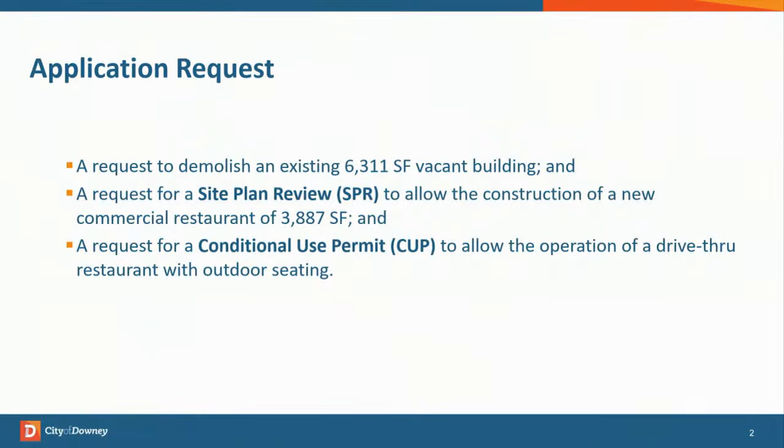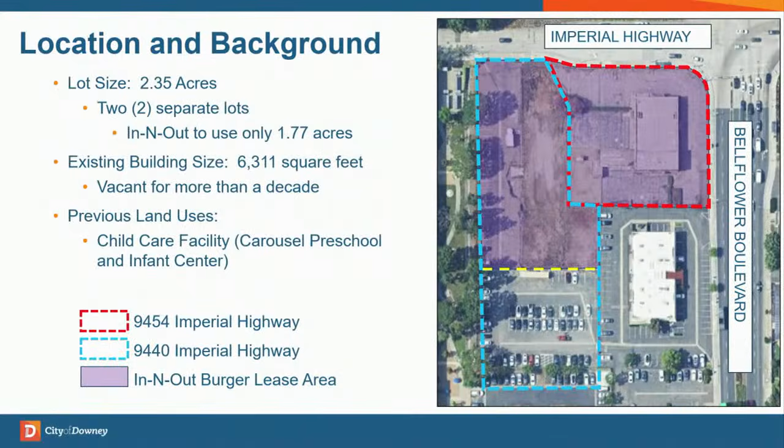The project site has an existing vacant building that has been vacant for more than a decade, which will be demolished as part of this project. The previous land use was a child care facility named Carousel Preschool and Infant Center.

The project site is surrounded by various land uses. To the west and north, we have Kaiser facilities. To the west is the fulfillment center for the pharmacy, and to the north is the Orchard Medical Building for Kaiser.

Can I ask a quick question on that? The Kaiser Fulfillment Center, that's not open to the public per se, is it? I went by there today and it looks like it's fenced in, or they have to come in the other way, but I don't think you can just come in there. No, I believe it's all fulfillment center, so it's for shipping, not for the public. Great, thank you, sir.

To the east, we have other drive-through businesses such as Starbucks, Jack in the Box, and the restaurant Stox, and a multi-tenant commercial building, and single-family residential properties. To the south, directly adjacent to the property, is another multi-tenant building, a parking lot, and the restaurant of Lucky Burgers.

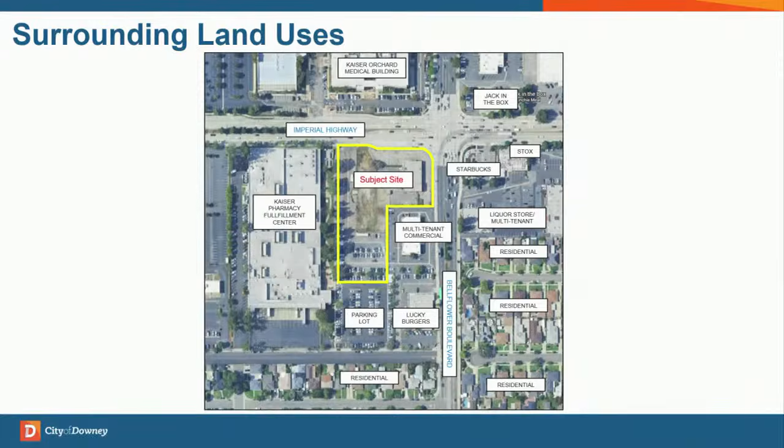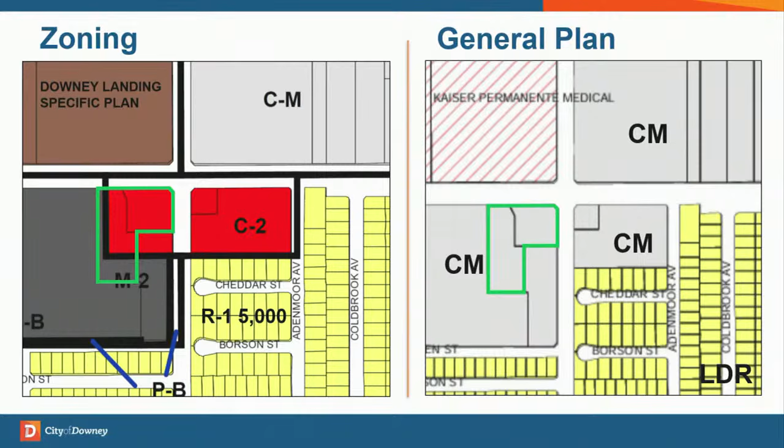The property is split zoned, so it's zoned C2, general commercial, and M2, general manufacturing. The general plan designation for the site is shown as CM, commercial manufacturing. Although the zoning and the general plan land use designation of the property are inconsistent, the use is allowed in both the C2 and M2 zone, aligning with the intent of the commercial manufacturing designation.

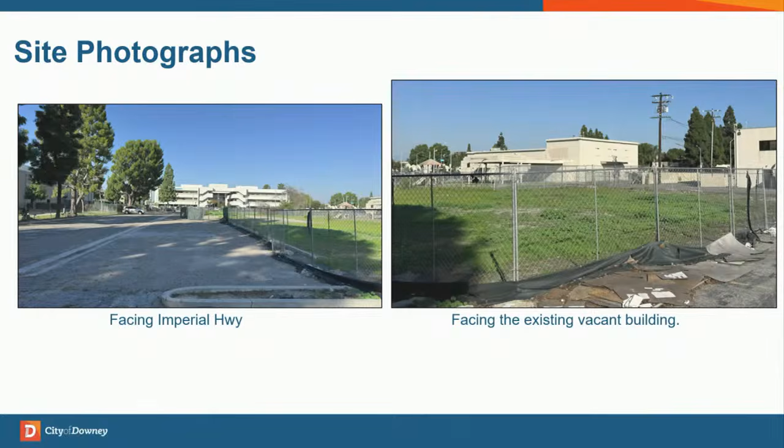As stated earlier, the project site consists of two properties, 9440 and 9454 Imperial Highway. In-N-Out will lease from the property owner the entirety of 9454 Imperial, which is the corner property in red, and the portion of 9440 Imperial.

Both properties will remain separate, but they will be held together through a lot tie covenant. The lot tie covenant will be recorded with the LA County Recorder's Office. In addition, the south portion of 9440 will remain a parking lot as it currently is. The restaurant and outdoor dining and the trash enclosure will all remain within 9440 Imperial. You could briefly see that in gray on the right image.

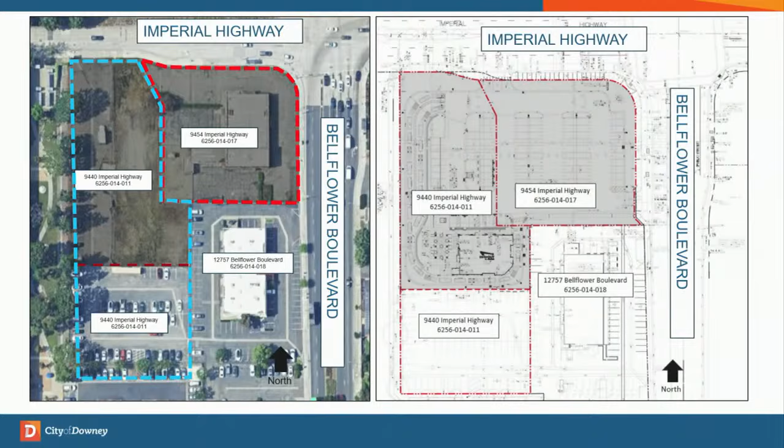The Bellflower improvement is not considered a dedication since the city has already purchased this portion of the property in 2015 when the city was conducting street widening improvements. Didn't the city take that corner a couple feet right before that too, in eminent domain? On the corner, we bought that off of them? I believe it was through eminent domain for that intersection, 2013, along with other property acquisitions for the other properties at that intersection. I'm an anti-eminent domain person, but that made sense there. I voted on that, so.

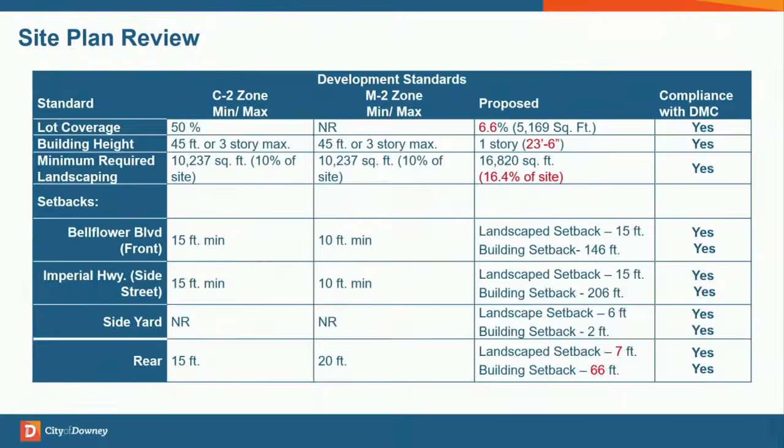Can I ask, of the 32 cars in the queue, how many can be inside that parking lot at any one time? That's obviously everybody's concern. At the time the plans were submitted to staff, that wasn't shown, but In-N-Out did provide some slides after our presentation. Those slides, I believe, show 59 spaces within the parking lot.

Could you also tell us how this compares to Lakewood and Firestone? I'll cover that later, but to answer quickly, the project at Lakewood and Firestone was approved for 14 queuing stalls, within the actual drive-through, not throughout the site. So that's 14 versus 32 here. Correct. That's great. Thank you.

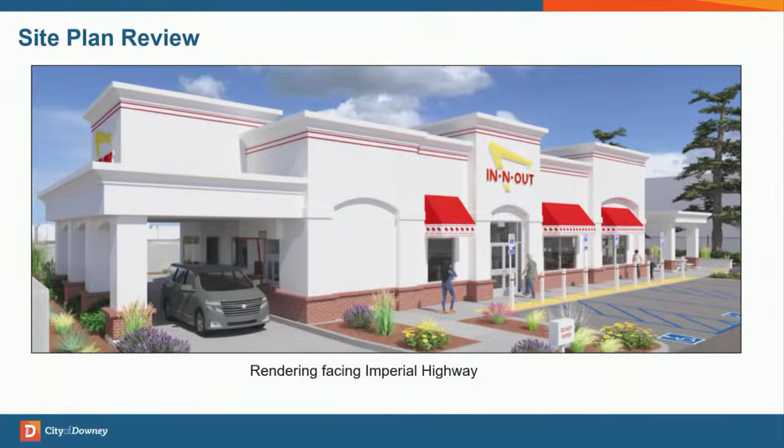The building uses contemporary modern architecture to keep the signature In-N-Out look. It will have varying roof heights with parapets ranging from 19 to about 24 feet, which allows the rooftop mechanical equipment to be screened from public view. Additional elements include red awnings over the windows and a red brick wainscot at the base of the building, wrapping around the entire structure to contrast the company's milk glass stucco color.

Mr. Luna, the million-dollar question — where would the iconic signage go? We did preliminarily receive a sign package; it'll be at the corner. I imagine you're thinking the X-shaped one — correct, yes. So that'll be at the corner, at the intersection of Bellflower and Imperial.

Okay, thank you. These are additional color elevations. Highlighted in red in the middle of the top image is the primary entrance facing Imperial Highway. The west elevation, facing the Kaiser Pharmacy Fulfillment Center, also has another entrance.

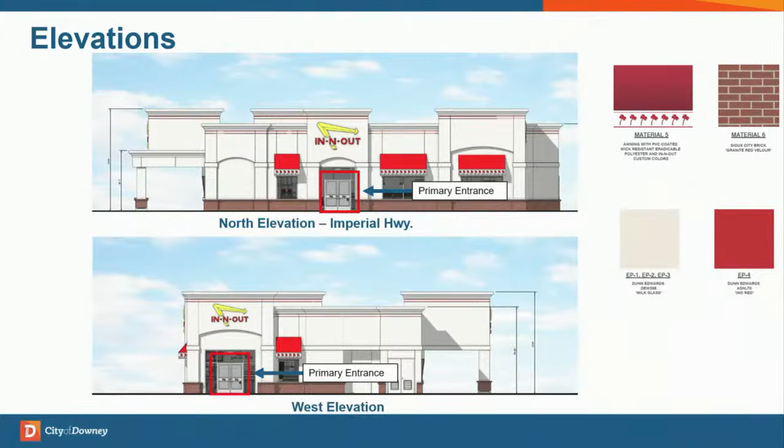Can I ask another question — this is 3,890 square feet. How big, square footage-wise, are the Firestone and Lakewood locations, just to get a visual comparison? I don't actually have that number — maybe the applicant can tell us at that point.

The elevations for the south and east are where the driveway wraps around. The south elevation has the payment window, and the east elevation has the pickup window.

Moving on to landscaping, a variety of plants will be part of this project's landscape palette. The site will have approximately 37 added trees from 5 different species and approximately 52 palm trees from 3 different species, in addition to native and drought-tolerant plants and shrubs. Most of the landscaping will be at the perimeter of the site and within the parking lot areas, improving the curb appeal at the corner of Bellflower and Imperial.

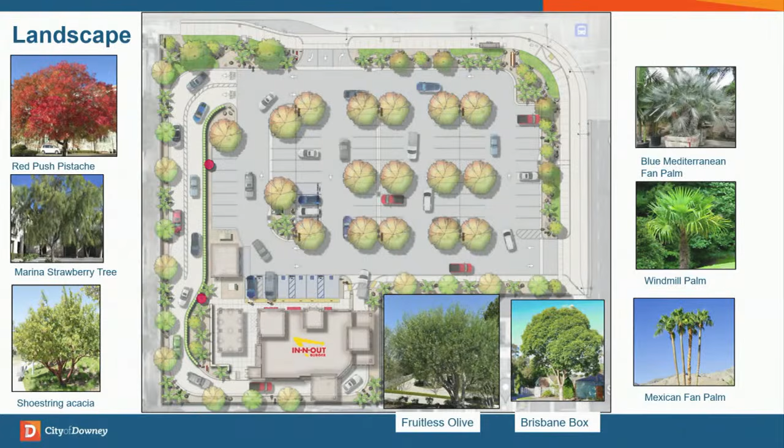Moving on to the drive-through, the project will have a double-lane drive-through that funnels into one lane at the order menu board toward the south end of the site. The drive-through will accommodate 32 cars within the drive-through lanes, which is sufficient based on the queuing analysis that was part of the traffic impact study, submitted by the applicant and reviewed by the Planning Division and Public Works Department.

But that first lane there, that's part of a queue, if you will, to go in there? Right, we call it a deceleration or dedicated right turn lane, and that's dedicated for turning into the project site, yes.

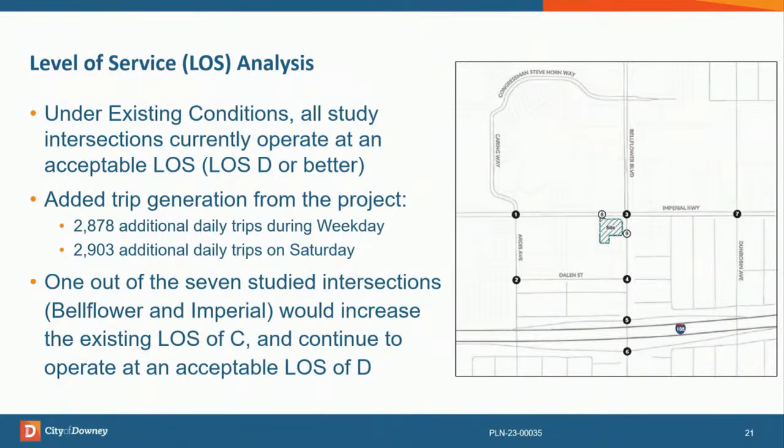So in relation to the queuing analysis, the off-site improvements will be required along both street frontages of Imperial Highway and Bellflower. The Imperial Highway improvement involves a roadway dedication of approximately 450 square feet to accommodate extension of the existing deceleration lane. This extension will accommodate right turns into the site without impacting traffic flow from Imperial Highway, specifically the right turn onto Bellflower.

The Bellflower Boulevard improvement is about 4,000 square feet. According to one of the plan sheets, it shows a cross gutter 6 feet wide, new sidewalk, and new lighting. So how is that going to mitigate the traffic impact if you're driving southbound on Bellflower Boulevard? What is that going to do to the traffic when you have an overflow?

So what is that 6 feet going to do to the impact of the flow going to the restaurant? Essentially this street improvement on Bellflower will add a third lane on Bellflower South. That lane adjacent to the project site is now only a right-hand turn in into the project site. The 2 existing lanes on Bellflower will still remain for traffic flow to flow south on Bellflower.

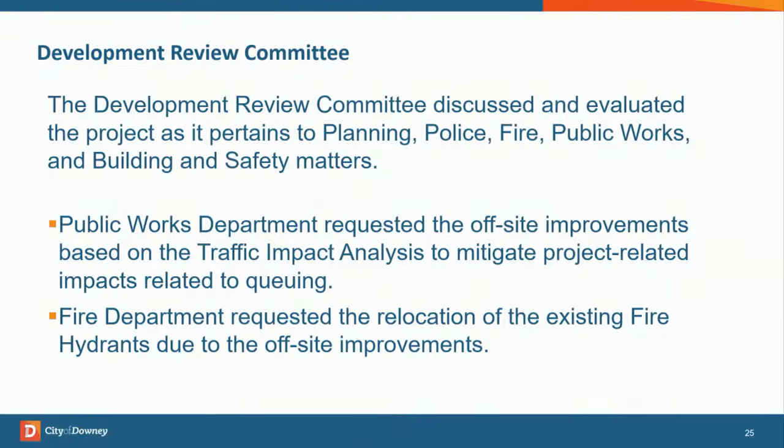The project was categorically exempt from CEQA under the Class 3 exemption for commercial properties that do not exceed 10,000 square feet.

A public notice was published in the Downey Patriot and sent to all property owners and tenants on November 20th. No opposition was received for the project.

In conclusion, staff recommends that the Planning Commission approve resolution number 25-4056 with the revised conditions of approval. I forgot to mention that we do have some revised conditions of approval which are on your dais. That changed 3 conditions in the resolution, and there are copies available for the public in the back.

That concludes my presentation. I'm available for any questions. Also with me, I have our principal engineer from Public Works, Tim Berthestel, and the applicant for In-N-Out and their traffic consultant to answer any questions.

Chair Guerra, if I may, also the conditions of approval in the staff report have been shared with the applicant's team, along with the revised conditions, and they are accepting the conditions. So there's nothing really big there.

Does anybody on the Planning Commission have any questions of staff? I know we were hitting him throughout, like we always do, so we appreciate your steady hand, sir.

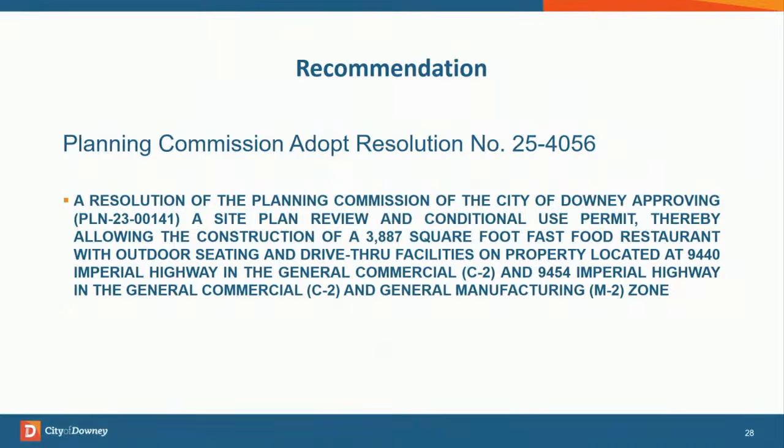Anybody? I don't have any questions, just a couple comments. Mr. Luna, great presentation, thank you for your time. I'm personally excited, I also drove by the site, and God knows we need a second location. The Firestone location, the traffic there could use some help. So thank you for this.

Anybody else? I have a question. In the event there is a backup on Imperial Highway entering the restaurant going eastbound, is there any provision at all to resolve that matter? We have conditions of approval that require the applicant to ensure queuing remains on site. Usually what In-N-Out does during peak times is send out staff to cone off the entrance on Imperial Highway to ensure queuing remains on site, so it'll flow throughout the project site. I'll show that on this slide. If you look to the right screen, the entrance will still be open, however queuing will wrap here and wrap all the way down there.

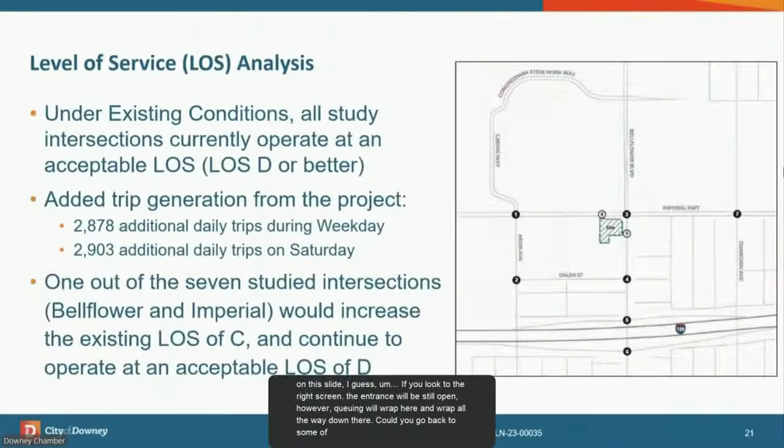Could you go back to some of the early slides, the land itself that was there before? So that bottom part there where there's a parking lot and so forth, is that new land that was there? Because I remember the long building that we all literally took apart piece by piece there for the last 40 years, that was so ugly and terrible. So what made this happen, that they bought more land?

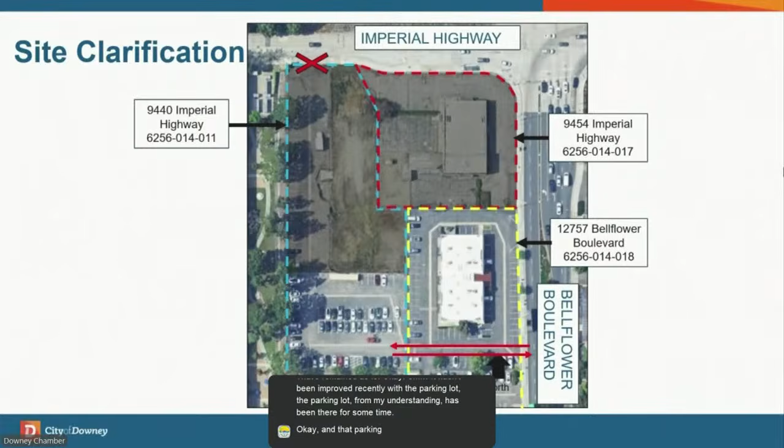It hasn't been improved recently with the parking lot. The parking lot, from my understanding, has been there for some time. And that parking lot is not going to be there anymore? No, because the land is up on top. So that parking lot will still remain.

I think this might show it a little better. It's a little bit smaller, but you see the project site and you see the remaining parking lot.

You're too young, but before you were born, that used to be a Jack LaLanne gym. Believe it or not, I once went to the gym. I know I don't look like it anymore, but I used to work out there, Jack LaLanne. It's been gone for 45 years, shows you how old I am. How much was a monthly membership back then? Oh, it was probably a couple of cheeseburgers worth, so it wasn't very much.

Anybody else, Mr. Lujan, Ms. Uva? Just a quick question. I know that the In-N-Out on Firestone, sometimes people trying to eat at the restaurant have a challenging time because the queue is inside. With the queuing here in the parking lot, will it avoid some of that congestion when people are trying to eat at the restaurant?

So the 32 car spaces for vehicle queuing would not impact the rest of the parking spaces. It doesn't create any dead-end drive lanes. It will still remain accessible to any patrons wishing to eat at the restaurant. In addition, with the additional parking provided, they could cone off portions of the parking lot to have the queuing flow better and still allow vehicles to park without getting trapped by the queuing.

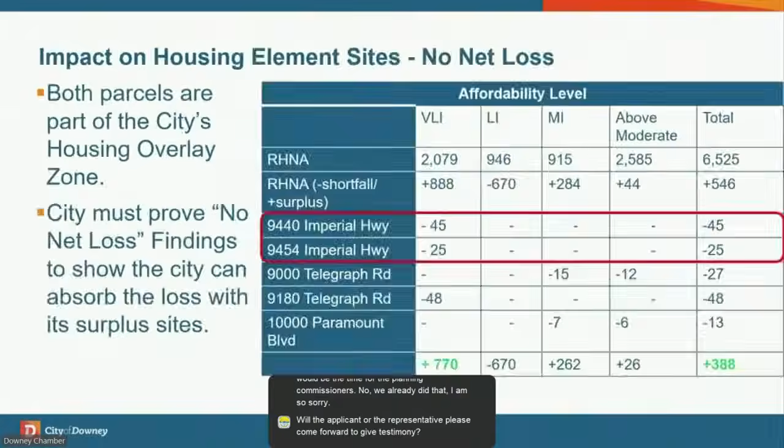Before I open the public hearing and call the applicant or representative, this would be the time for the planning commissioners. No, we already did that. I am so sorry. Will the applicant or representative please come forward to give testimony? I did call this before, didn't I? I called the public hearing. Should I do it now? I don't think I officially said the public hearing was open, so we will officially call it. I did want to make it really tough on our city attorney asking legal questions since it's his birthday today. I think we should make it as hard as him to have to work today and interpret things, sir. I'm teasing you, but happy birthday, sir. He got nervous, like, what the heck is Chair Guerra doing there. Sir, welcome, yes sir.

Thank you, happy birthday, John. Good evening, Honorable Chair and fellow planning commissioners. My name is Peter Kolmaticki, and I'm a development manager with In-N-Out Burger.

I'm excited to be here this evening to propose our second location within the city of Downey. First, I'd like to take this opportunity to thank staff, especially Abraham Luna and Irma Huitron, for their hard work and responsiveness during the development review process. Their constant communication and coordination is truly impressive and should be recognized.

I will keep my remarks brief, but I would like to spend a few moments touching on the history and culture of In-N-Out Burger before discussing our proposed project.

In-N-Out Burger was founded in 1948 by Harry and Esther Snyder in Baldwin Park, California. Now more than 77 years after they opened that very first location, with over 400 stores operating in 9 states, In-N-Out is still a family-owned business. Every single In-N-Out Burger is 100% privately owned and operated. We do not franchise. Harry and Esther's granddaughter, Lynsi Snyder, is the owner and president of In-N-Out, and she continues the legacy with our core values of quality, service, and community.

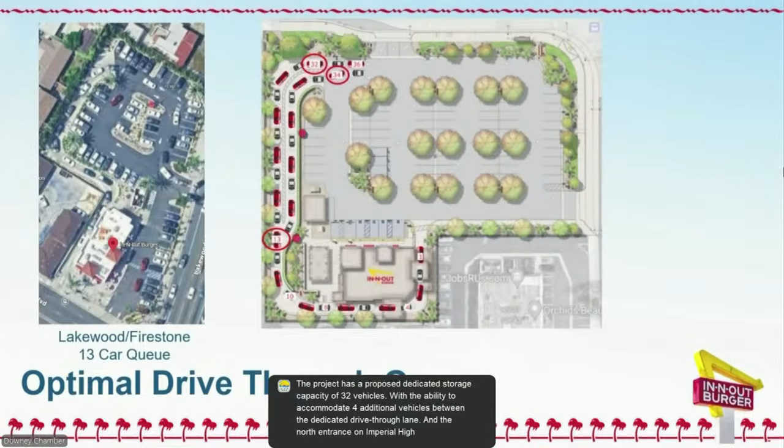In addition, In-N-Out has developed a very sophisticated system, implemented in new stores, to speed up queue movement during peak times. Our queue management system begins when the stack reaches the menu board at car 10. At this stage, associates are deployed with handheld devices to take orders outside.

Awareness of the queue reaching the 10th car is enhanced with outdoor cameras and indoor monitors. There will be between 4 and 6 outdoor cameras on site, with 3 or 4 of them specifically viewing the drive-through lane. These exterior cameras display on multiple monitors located inside the restaurant, including the manager's office, above the grills, and at both the pay and pickup windows.

If the queue were to extend past the dedicated queue length, additional associates are deployed to manage the queue and traffic on site. This restaurant will be equipped with 3 burger grills.

2 grills will operate at all times. Activation of the 3rd grill will be done in response to high dine-in or, more typically, high drive-through demand, as activating the 3rd grill significantly increases the speed at which drive-through orders are delivered to customer vehicles.

To avoid any disruption to surrounding roadways, we have overstacking capacity of up to approximately 59 vehicles on site. With these practices and site design, we were intentional about minimizing impacts to the neighborhood and getting our customers onto our site as efficiently as possible.

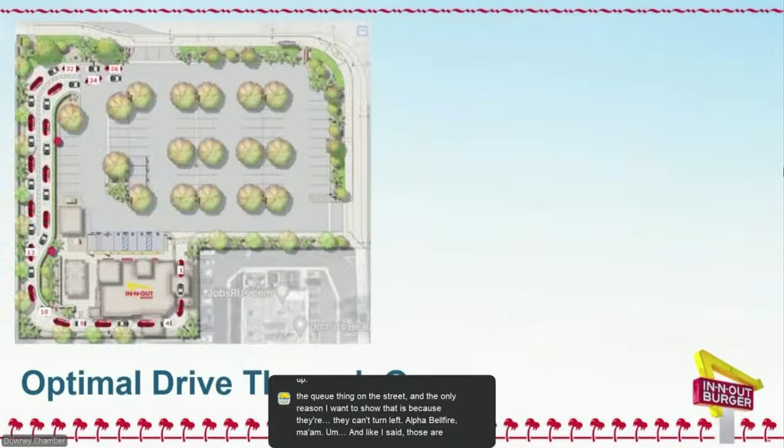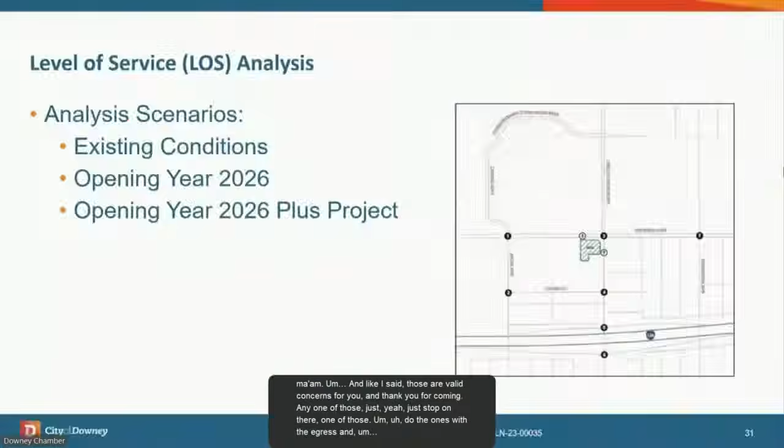Could you, Alfonso, put up the queue thing on the street? The only reason I want to show that is because they can't turn left off of Bellflower, ma'am. Those are valid concerns for you, and thank you for coming. Any one of those, just stop on there, one of those. Do the ones with the egress and the ones before. Okay, that's a good one here. Go back, there we go.

This is good, because you can see the side entrance here on the right side, ma'am. You live just south of that building there. You can only go right off when they're leaving there. They can't go left because there's a median in the middle, and the same thing up here. It would have to be somebody going northbound on Bellflower literally making a U-turn at the corner to turn around. They can't go into that queue and make a left-hand turn off of Bellflower.

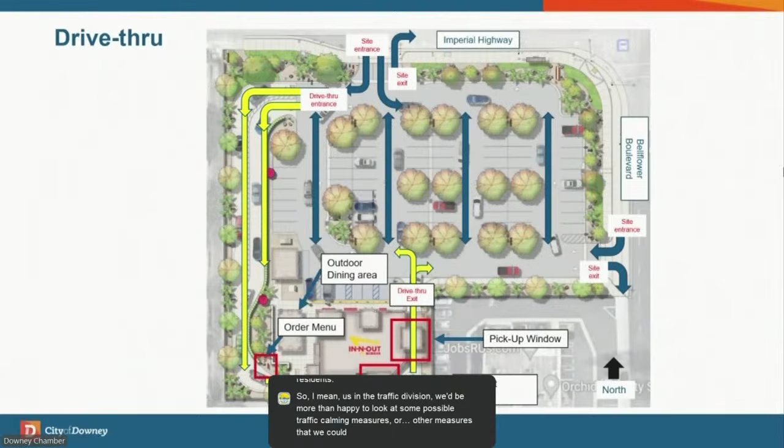I'll let the staff answer that, but those are valid thoughts, ma'am. That is correct, the medians restrict the left turn movements. But that said, we frequently review these types of issues brought forth by residents. We in the traffic division would be more than happy to look at possible traffic calming measures or other measures we could implement on Downey to alleviate residents' traffic concerns.

How far does the median go down there? Is there a better view that shows all of that? That shows another angle, there was one that was the actual footage. Maybe go back, sir.

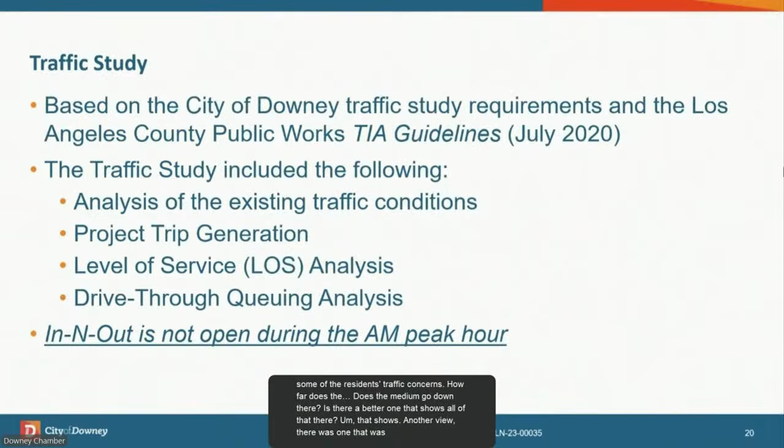Okay, so there's the building there. So you live just south of this, where that little green thing is at the bottom of the page, right? Chair Guerra, I think the median ends just north of Dalen, which is the first west-east street, right below the end of that median. I wasn't sure if the resident lived on Dalen and Borson, but Borson is what I thought I heard — that's the next street south of Imperial, so that's the second. Are we allowed to turn left into the other burger place? Yes, you are. So that queue there doesn't extend there. So you live just south of that?

Okay, we get a lot of overflow from the Kaiser facility, so we get a lot of traffic just speeding by our street, and on Dayland Street, because when traffic backs up making a left toward Imperial — that's a two-way, there's a U-turn allowed, but a lot of people don't know how to make that U-turn. So it backs up traffic because of people making U-turns, especially since it's right off the freeway, off the 605 and the 105. It's a very congested freeway, with Bellflower going north. So that's our biggest concern, because a lot of people use our street, Borson Street and Dayland Street, as a way to bypass that traffic.

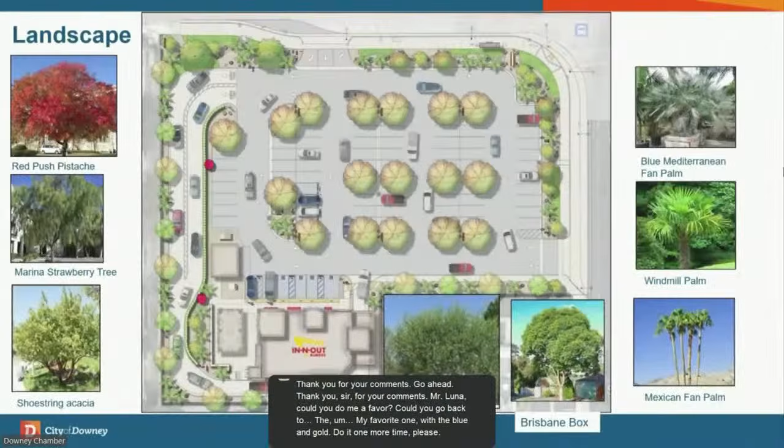Go ahead, thank you sir for your comments. Mr. Luna, could you do me a favor — go back to my favorite one with the blue and gold. The blue one, one more time please. Yeah, there, that one. No, yes, I'd like you to go ahead and pinpoint where our resident made those comments.

Sir, there will be an entrance on Imperial and another one on Bellflower. Correct, so we have both, not just Imperial. No, that's my point — but if people are making the U-turn, if you go by there, in order to make a U-turn you have to make it really wide. Sure, understood. A lot of people make it short and sharp, and that backs up traffic. It's a way for a car — so no matter which way you look at it, it's going to cause more backup than it already does, going north. So this is just going to cause more.

Chair, we're not able — if we could record public comment — that would be ideal. Thank you. We're out of line now. You guys are nice people with valid concerns, and we're trying, but the three minutes are up and we really shouldn't be doing this, but we understand.

And yes, sir, go ahead. From the Public Works traffic side of things, we'll initiate a traffic speed study. We have city-owned counters, so we can have our staff place them on Dahlin and Borson and look at what impacts are actually occurring on that street. So that's a bit of an answer — we'll check that out.

And then number two, I wanted to make sure we're clear. There's nothing in this we're approving, and there's no plans to put any digital boards or signage on the freeway. I just wanted to confirm that from staff. From the sign package we received preliminary from In-N-Out, there are no digital boards proposed for the site, only monument signs and wall signs attached to the building. Thank you, just wanted to answer that.

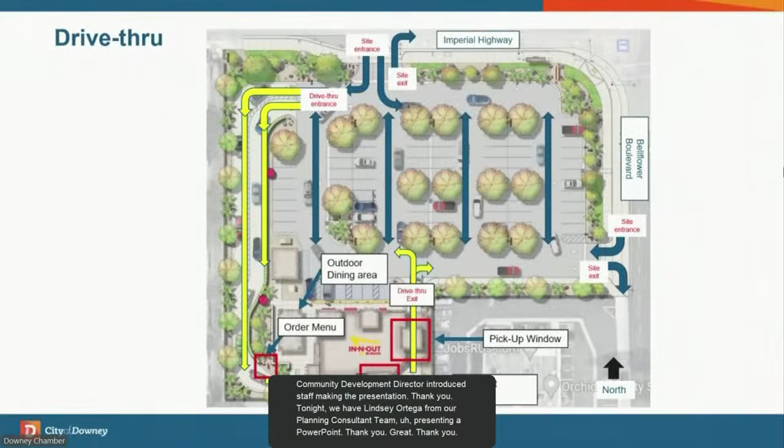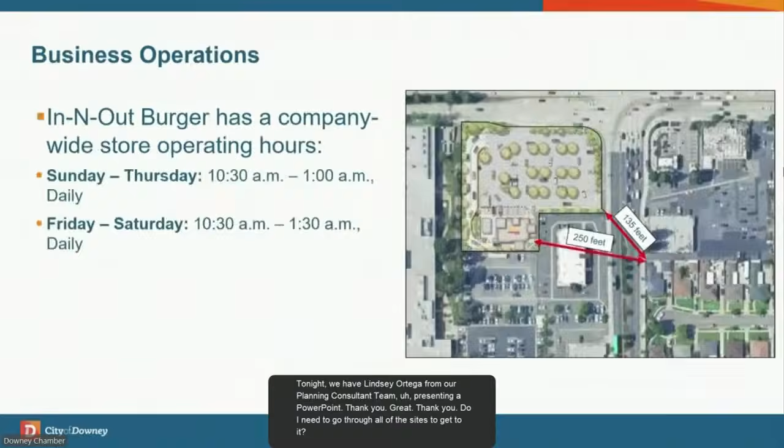Do I need to go through all of the slides to get to it? Okay, oh yeah, we're sorry. Pick your favorite and we'll go back to it.

Good evening. Hello, Chair Guerra and members of the Planning Commission. My name is Lindsey Ortega, and I will be presenting PLN 25-00127 to you today. Before you today is a request for approval of a conditional use permit to permit the operation of a 139,745 square foot entertainment center with arcade, bowling alley, indoor sporting activity area, and a restaurant with an ABC Type 47 on-premise sale and consumption of alcoholic beverages.

A conditional use permit is required to permit on-premise sale of alcoholic beverages, commercial recreation, and arcades within the Stonewood specific plan. Although a commercial recreation facility use is not explicitly listed as a permitted use in the Stonewood specific plan, the specific plan does permit uses not specifically listed to be considered by the Planning Commission through a conditional use permit. Other commercial recreation facilities that operate at the Stonewood Center include Galactic Challenge and Candyland Kids. The Stonewood Center is located on the north side of Firestone Boulevard between Lakewood Boulevard and Woodruff Avenue on a 63-acre site.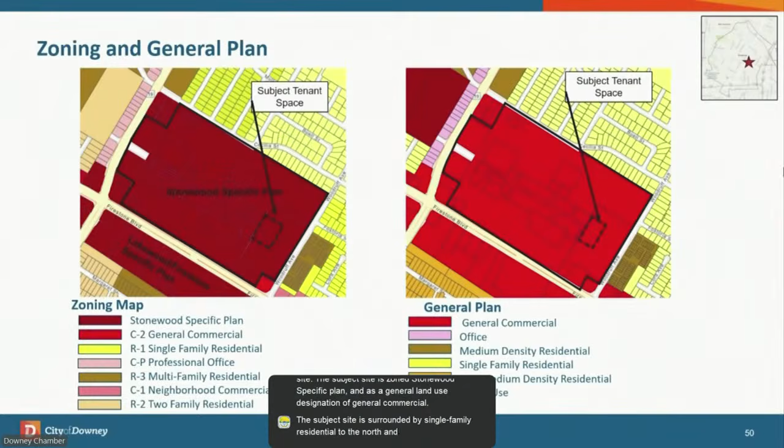The subject site is zoned Stonewood Specific Plan and has a general land use designation of general commercial. The subject site is surrounded by single-family residential to the north and east, and commercial and office use to the south and west.

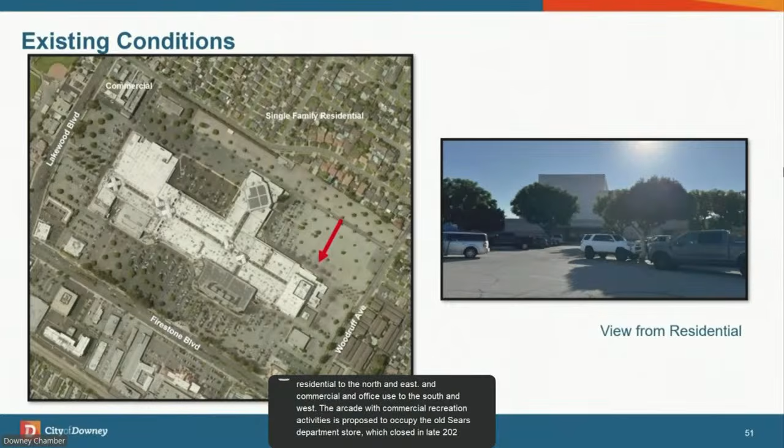The arcade with commercial recreation activities is proposed to occupy the old Sears department store, which closed in late 2021 at the Stonewood Center. Here's a view from the single-family residential, a view from Woodruff, and a view from Firestone, as it is today.

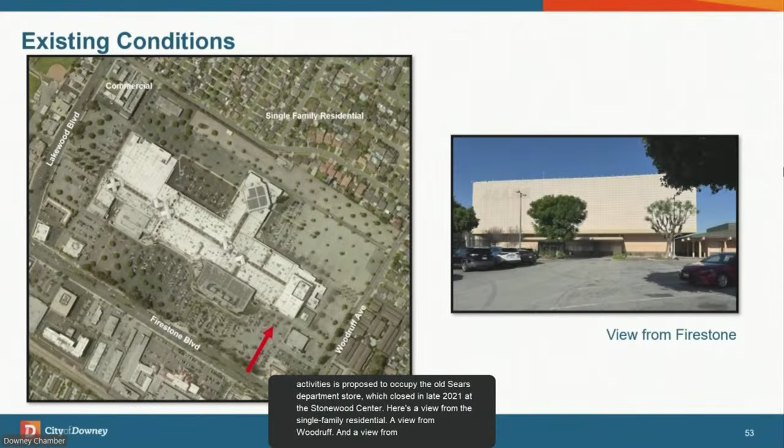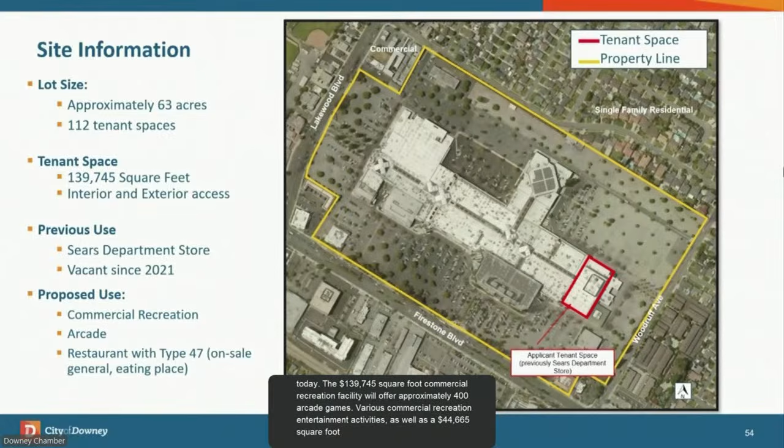The 139,745 square foot commercial recreation facility will offer approximately 400 arcade games, various commercial recreation entertainment activities, as well as a 44,665 square foot food hall with a Type 47 license for on-premise alcohol sales. The proposed hours of operation for the arcade, commercial recreation use, and restaurant are 10 a.m. to 2 a.m., Monday through Sunday, and the use is intended to serve as an entertainment center for all ages.

Private rooms will be available for rent to host birthday parties, corporate events, and used for private karaoke rentals. The private rooms will include TV, karaoke equipment, and feature a clear glass wall and door to ensure full visibility from common areas at all times.

The first floor of the 3-story entertainment use includes a 16,472 square foot entertainment area, including the arcade, as well as a 44,665 square foot dedicated area to food preparation and food service, with some area used for office space and storage.

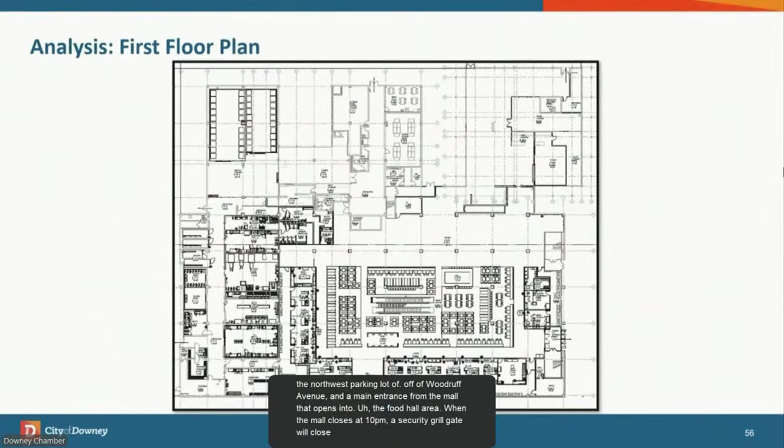There are 3 entrances on the first floor: a primary entrance from the parking lot facing Firestone Boulevard, a secondary side entrance from the northwest parking lot of Woodruff, off of Woodruff Avenue, and a main entrance from the mall that opens into the food hall area. When the mall closes at 10 p.m., a security grill gate will close access from the mall to the Round 1 facility.

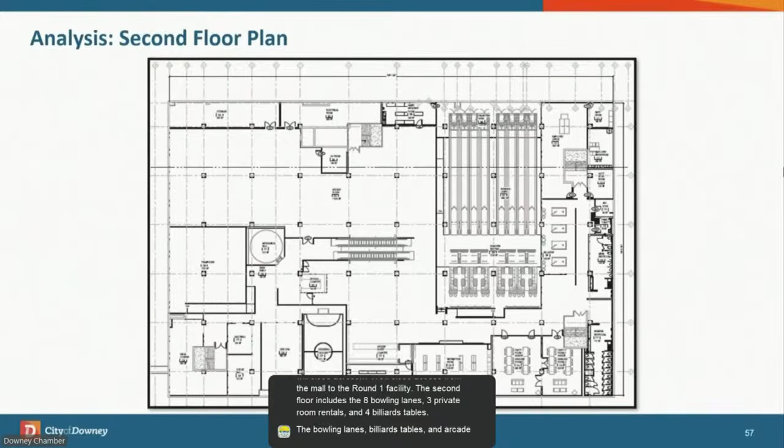The second floor includes 8 bowling lanes, 3 private room rentals, and 4 billiards tables. The bowling lanes, billiards tables, and arcade games can be used based on a pay-per-use basis.

The third floor offers an additional arcade space, as well as a signature feature of the entertainment center called the Spocha, or the Sports Challenge Area, which serves as an indoor sports complex offering dodgeball, trampoline, ninja course, kids gym, basketball, indoor soccer, inline skating, pickleball, and batting cages.

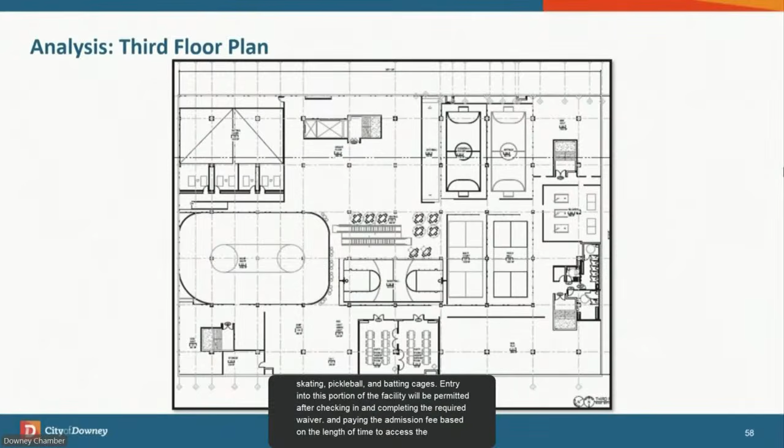Entry into this portion of the facility will be permitted after checking in and completing the required waiver and paying the admission fee based on the length of time to access the area. This grants unlimited access for the specified timeframe to enjoy the different activities.

The 44,665 square foot food hall is located on the first floor with access points into the main mall, and the food hall will offer a variety of Japanese food options with restaurant seating and a single bar located in the center of various restaurant options.

The food hall will also serve as a central kitchen where food will be prepared, packaged, and distributed to Round 1 affiliated food hall locations throughout Southern California. All food will be prepared on-site by Round 1 employees, with service provided throughout the day and evening hours, and pickup for the central kitchen is to occur twice a week in the morning.

However, demand may grow, and pickups may also occur more frequently. Food will be distributed through the use of small refrigerated Sprinter vans.

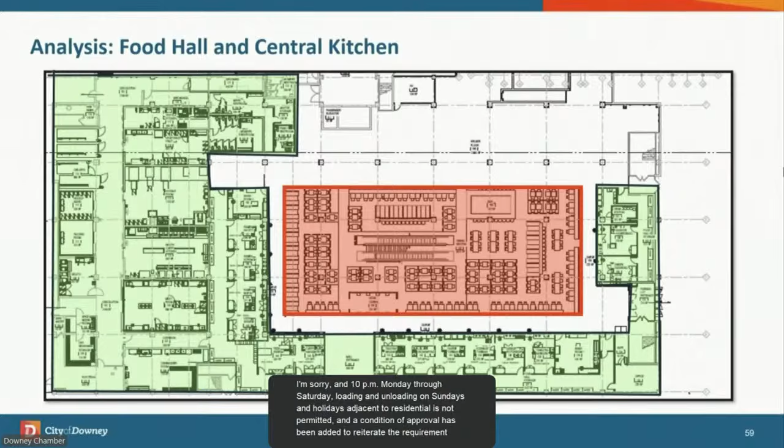The Stonewood Specific Plan limits loading and unloading adjacent to residential uses to only occur between 7 a.m. and 10 p.m., Monday through Saturday. Loading and unloading on Sundays and holidays adjacent to residential is not permitted, and a condition of approval has been added to reiterate the requirement from the specific plan.

A Type 47 ABC license for on-premise sale and consumption of alcohol is proposed in conjunction with the restaurant and food hall. Alcoholic beverages may be purchased in the food hall restaurant area and may be consumed throughout the entire recreational facility. Consumption of alcohol will be monitored throughout the facility by way of ID verification, and a curfew plan is proposed for the later hours of operation.

A third-party security company will be utilized by Round 1, ensuring orderly conduct throughout the facility, including the purchase of food and alcohol.

Previously, the Sears tenant space was calculated at a rate of 1 space per 200 square feet for the 143,427 square foot tenant space. This required 718 parking spaces.

Per the Stonewood specific plan, the commercial recreation facility would be classified as other commercial uses, which would require a 1 space per 1,000 square foot requirement, resulting in a total of 476 parking spaces for the commercial recreation use. In total, the proposed use would require 521 parking spaces.

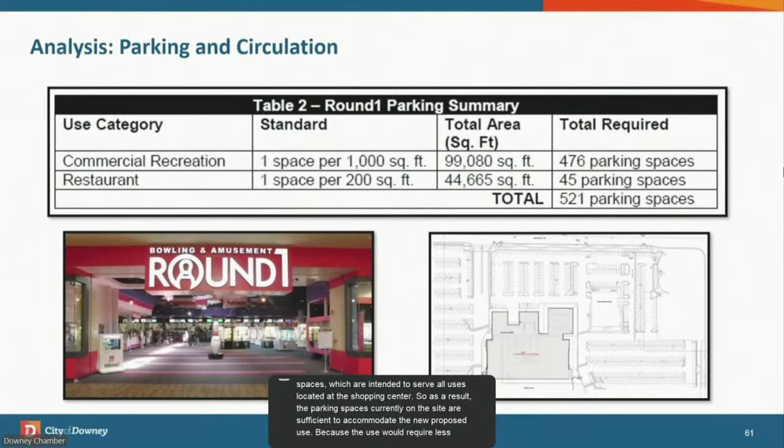The Development Review Committee discussed and evaluated the project as it pertained to planning, police, public works, building and safety matters, as well as fire. Two noteworthy conditions include: all loading and unloading shall comply with the Stonewood specific plan, and the operator shall implement a curfew plan that includes announcements over the store speaker 30 minutes prior to each curfew.

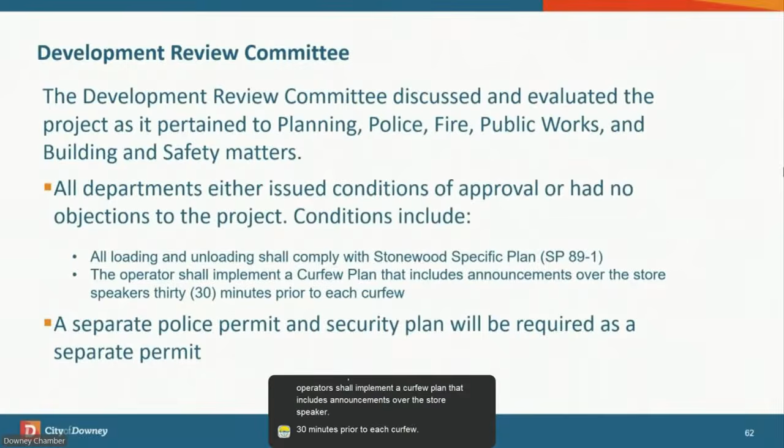The conditional use permit is categorically exempt from review under CEQA guidelines Section 15301 because it has been determined to not have a significant effect on the environment, due to the proposed use being contained within an existing building and not resulting in an expansion of that building.

On November 19th, 2025, the notice of pending public hearing before the Planning Commission was published in the Downey Patriot and was mailed to all tenants within 500 feet of the subject site.

Staff, a memorandum was provided on the dais regarding some conditions of approval. There were three minor typographical errors to conditions 16, 23, and 50, and those are included, and also there are copies for the public to view. In addition, there is a minor change to condition of approval number 8 that was not listed in that memorandum, and that relates to the hours of operation.

The hours of operation in the staff report list 10 a.m. to 2 a.m., whereas the condition of approval says 12 p.m. to 2 a.m., so that should be changed to 10 a.m. to 2 a.m.

And with that, staff concludes their presentation. We recommend to the Planning Commission approval of resolution number 25-4057 for a conditional use permit that would allow the operation of a restaurant with ABC type 47, the arcade, and the indoor recreational area. I'm available to answer any questions if there are any. And the applicant has their representative, Jennifer Oden, here, along with the Round One team.

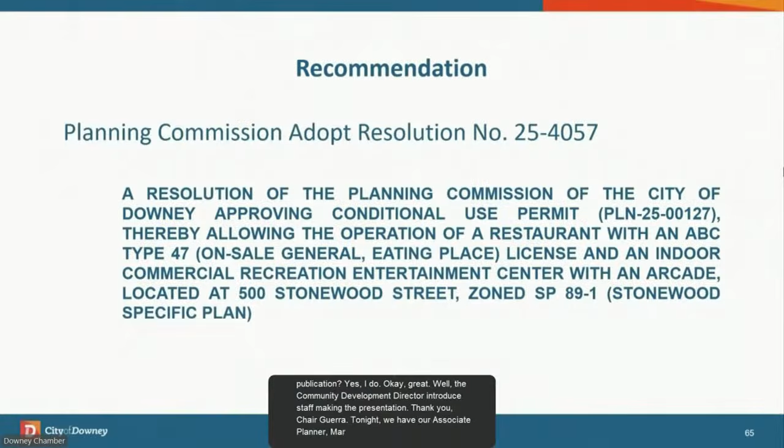Will the Community Development Director introduce staff making the presentation? Thank you, Chair Guerra. Tonight we have our Associate Planner, Marissa Montero, who will be reviewing the PowerPoint with you. Thank you.

Good evening, Chair Guerra, Vice Chair Uva, commissioners, and members of the audience. The item before you is PLN-25-00135 and PLN-24-00084, a project at 9305 Firestone Boulevard for a Rebel Shell gas station. This is a request for the demolition of the existing 2,300 square foot fuel canopy and 200 square foot convenience store, and the construction of a 2,400 square foot convenience store with a Type 20 off-sale beer and wine liquor license, a new 2,021 square foot canopy over 8 fuel pumps, and the retention of an existing drive-through car wash with other site improvements.

The following entitlements are requested as part of this application and require review and approval by the Planning Commission. First is a site plan review for all new structures and site improvements. The second is a conditional use permit for liquor stores and other off-sale alcohol establishments.

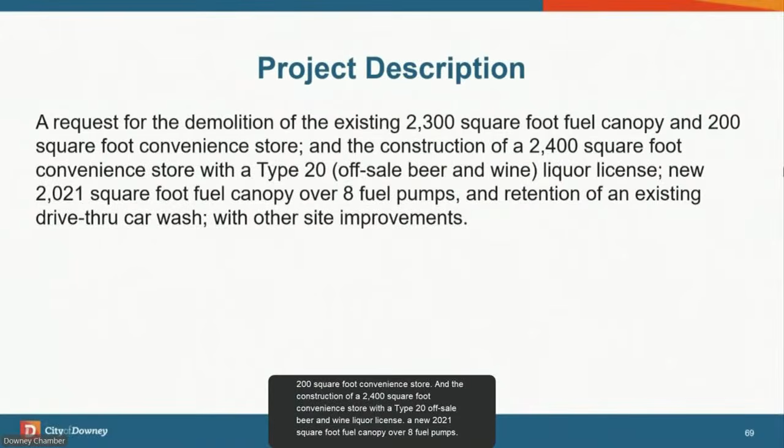So the item before you is PLN-25-00135 and PLN-24-00084 at 9305 Firestone Boulevard for a Rebel Shell gas station. This is a request for the demolition of the existing 2,300 square foot fuel canopy and 200 square foot convenience store, and the construction of a 2,400 square foot convenience store with a Type 20 off-sale beer and wine liquor license, a new 2,021 square foot fuel canopy over 8 fuel pumps, and retention of an existing drive-through car wash with other site improvements.

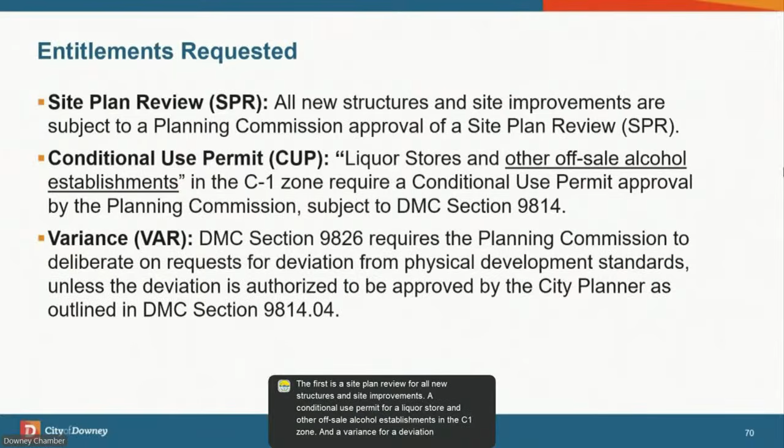The following entitlements are requested as part of this application and require review and approval by the Planning Commission. The first is a site plan review for all new structures and site improvements, a conditional use permit for a liquor store and other off-sale alcohol establishments in the C1 zone, and a variance for a deviation from one physical development standard.

The project site is located on the northeast corner of Firestone Boulevard and Woodruff Avenue on a 21,780 square foot parcel that is currently developed with a 2,300 square foot fuel canopy, a 200 square foot convenience store, and an 874 square foot drive-through car wash. The convenience store is located underneath the fuel canopy.

The Planning Commission first approved the service station through zoning exception case number 228 in 1961, which authorized the establishment, operation, and maintenance of a service station with pump islands. In 1982, the site was redeveloped to its current configuration with a new fuel canopy, fuel pump islands, a convenience store, and updated site layout. The existing drive-through car wash was later approved by the Planning Commission in 1996.

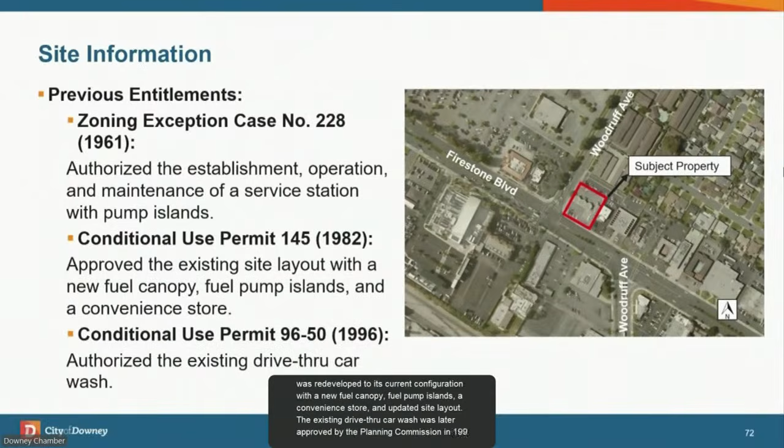The subject property is zoned C1 Neighborhood Commercial and has a general plan land use designation of general commercial. The surrounding area has a variety of different zones and land use designations. To the north is single family and multifamily residential. To the east is single family residential and neighborhood commercial. To the south is general commercial, specifically the Lakewood Firestone specific plan. And to the west is general commercial and the Stonewood specific plan.

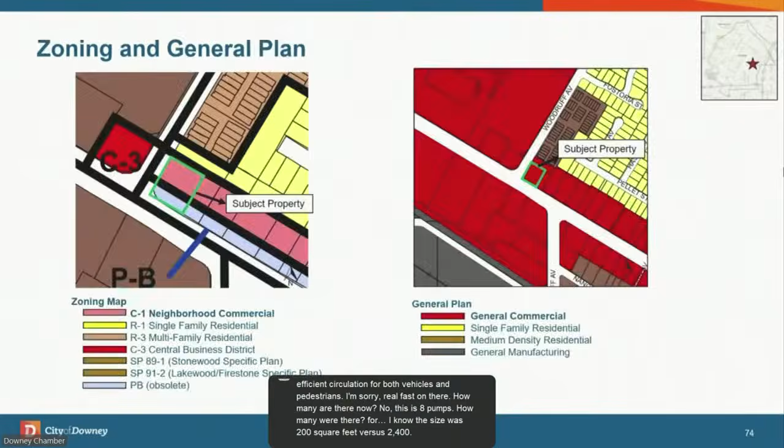I'm sorry, real fast on there. How many are there now? I know this is 8 pumps. How many were there before? I know the size was 200 square feet versus 2,400, but I don't remember how many. There was 8, and this is going to continue to be 8? Okay, I remember reading. I can't remember off the top of my head. I think we can look into it and get back to you. Yeah, it's not urgent, I just wanted to see how many we had now.

So the drive aisles have been designed with adequate width to accommodate vehicles accessing the fuel pumps, the car wash, and the convenience store. The new site layout also includes circulation enhancements for the existing car wash, adding a queuing lane of 6 vehicles to enter and 2 vehicles to exit. To further promote safety throughout the site, the drive-through car wash exit will also include a stop sign and a speed bump to reduce the potential for collisions for vehicles exiting the car wash and vehicles entering the site from Firestone Boulevard. The site will also include a new trash enclosure, 9 parking spaces, and a combination air-water vacuum unit.

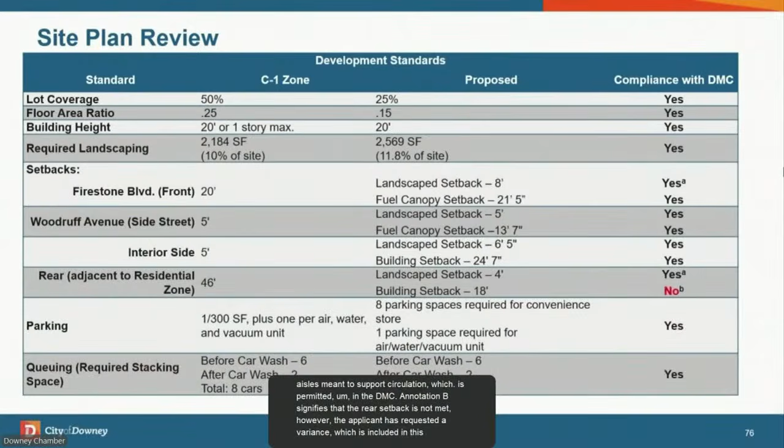The proposed site layout has been designed to comply with all applicable development standards of the C1 zone, as well as standards related to drive-through services and service stations. On the screen, you can see various development standards that we've analyzed for compliance. There are two annotations. Annotation A for the front setback and rear setback for the landscape setback signifies that portions of the front setback and rear setback that are not landscaped are because of approved drive aisles meant to support circulation, which is permitted in the DMC. Annotation B signifies that the rear setback is not met. However, the applicant has requested a variance, which is included in this application and will be discussed in the variance section of this presentation.

The proposed development incorporates a contemporary architectural design for the new convenience store, new fuel canopy, and existing car wash. The convenience store building features a combination of high-quality materials, including stone veneer, board and batten siding, standing seam metal roofing, and fiber cement trim, creating a visually appealing and durable facade. The drive-through car wash exterior will also be renovated to match the same materials and architectural style of the new convenience store. The fuel canopy incorporates a standard shell corporate design package and utilizes the same stone veneer as the convenience store.

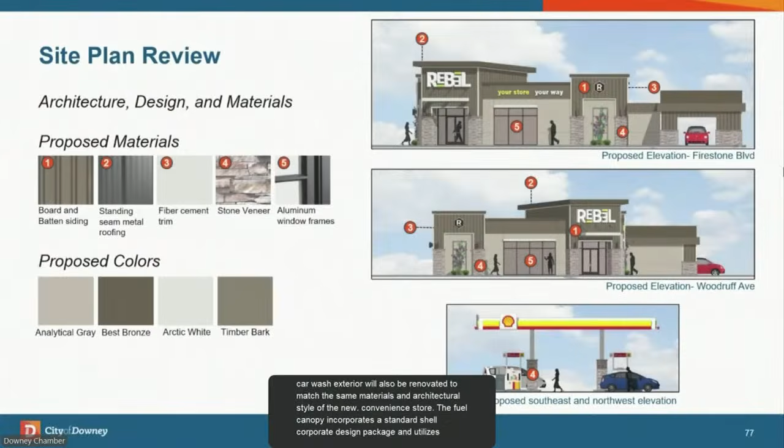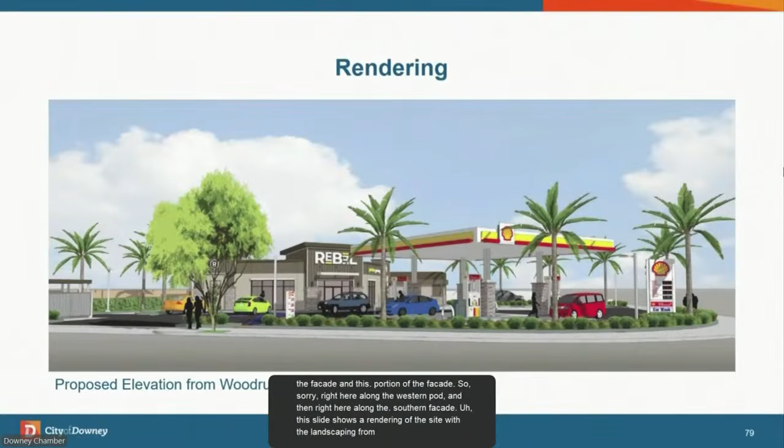The convenience store is proposed to operate 24 hours a day, 7 days a week, but the sale of alcohol will be prohibited between 2 a.m. and 6 a.m. The applicant expects there will be 3 to 4 shifts per day with 1 to 5 employees per shift, depending on the site needs. To ensure responsible retail operations, employees will undergo training in customer service, personnel management, facility operations, responsible retailing of alcohol and tobacco, and workplace safety.

Can I ask a question on there? So what do we estimate the alcohol sales to be at this location? Do we have a number? A percentage of their sales? I think that's a question for the applicant to answer, yes. Okay. And how about, I'd ask the same thing. I mean, they currently have permission to sell tobacco now, right? So that's not new, okay. Yes. Okay.

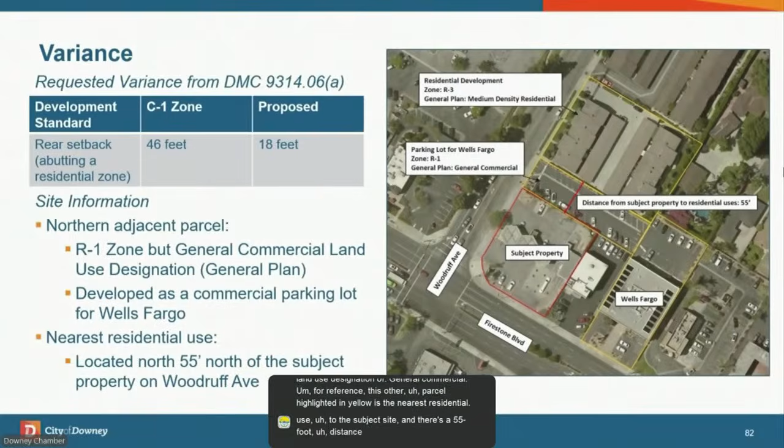For reference, this other parcel highlighted in yellow is the nearest residential use to the subject site, and there's a 55-foot distance between the subject property and the nearest residential use.

So the need for the variance results from the adjacent sites' existing inconsistencies between zoning and the general plan, not from any action by the applicant. Other similar commercial properties on Firestone meet the increased 46-foot rear setback requirement when immediately adjacent to residential uses. Applying the residential rear setback standard in this situation would impose an unnecessary constraint inconsistent with the existing and intended commercial character of the area.

The project does maintain an 18-foot rear setback, which exceeds the 15-foot setback required when a commercial property is adjacent to another commercial property in the C1 zone. Thus, granting the variance does not confer a special privilege, but instead aligns the site's treatment with surrounding commercial development and the general plan's intended land use pattern.

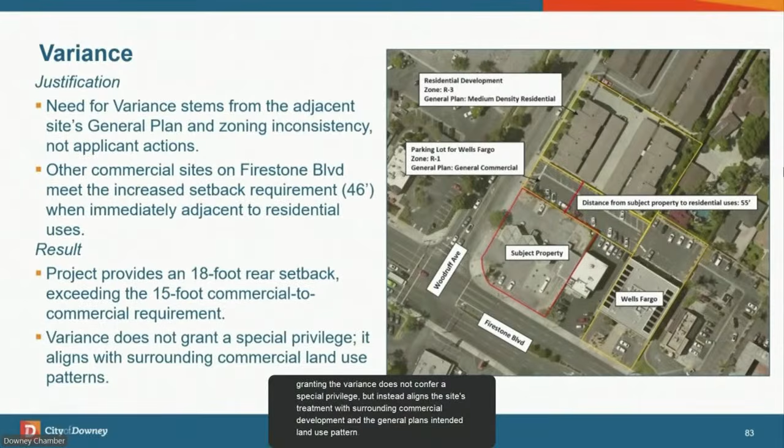The Development Review Committee discussed and evaluated the project as it pertained to planning, police, fire, public works, and building and safety matters. All departments issued conditions of approval related to the proposed site improvement and Type 20 ABC license.

Staff has reviewed the proposed project for compliance with CEQA and determined that the project is exempt from review under CEQA Guidelines Section 15303, Class 3, new construction or conversion of small structures.

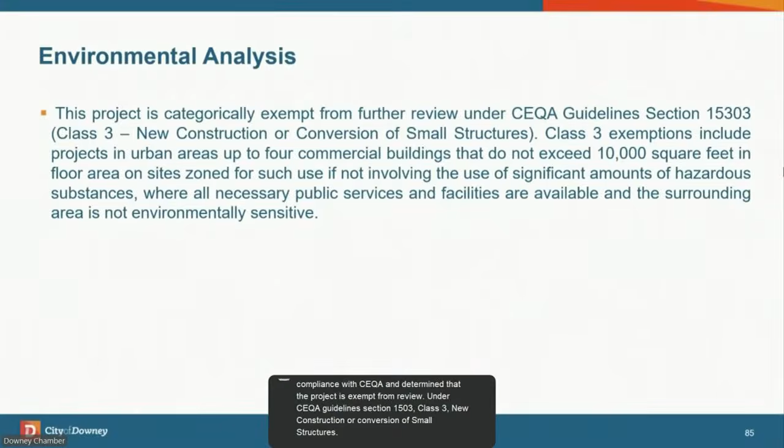On November 20th, the notice of the pending public hearing before the Planning Commission was published in the Downey Patriot and mailed to all tenants and property owners within 500 feet of the subject site.

They also state that there is already an existing Type 20 license for an ARCO AM/PM on Lakewood Boulevard, located within the same census tract as the subject property. They also provide three nearby liquor retailers along Firestone Boulevard as evidence of overconcentration.

The letter also states that issuing the license would cause public safety concerns contrary to public welfare. Finally, the license would generate many more traffic trips, thereby causing greater congestion and risk of accidents on Firestone Boulevard, additionally stating that an exhaustive traffic study was not conducted.

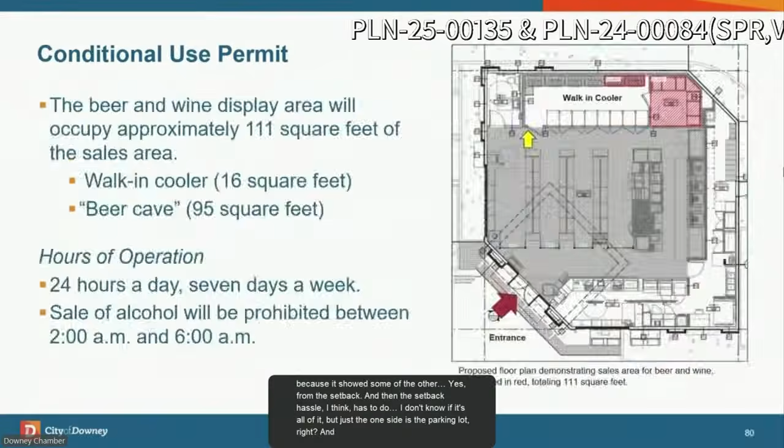So I want to get to this photo. So the existing setback from, I'll point on the screen over here, this structure to the rear property line is about 48 feet currently. And the new one's going to be a lot closer. The new one will have an 18-foot setback, that's to the rear property line. Okay, I remembered, I saw the number 18 somewhere in there.

And the car wash is going to be at the same location there? Correct. The car wash will only undergo exterior modifications to match the architectural style of the new building. So that white building, that's the one I was talking about, I don't know what the use is, it looked medical to me or something like that. But that one there is already there, right? And the car wash doesn't really impact it at all. Correct. And then there's 55 feet on the parking lot back there.

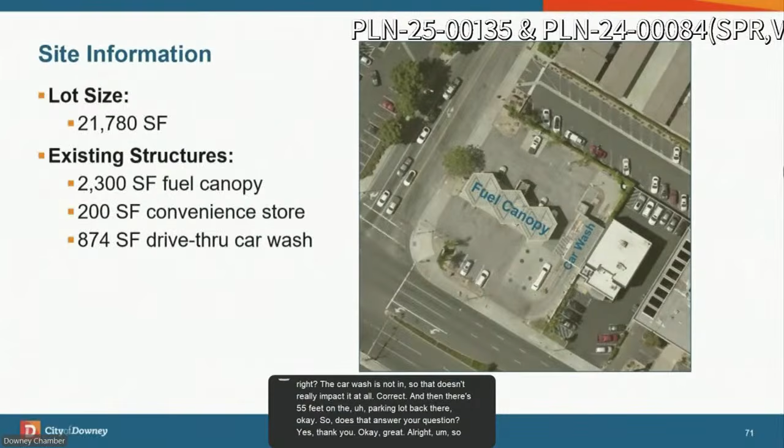Yes, thank you. Okay, great. All right, so now, what is the pleasure of the Planning Commission? May I have a motion and a second?

Yeah, absolutely, Chair Guerra. I'll make a motion to accept staff recommendation and approve PLN-25-00135 plus the additional items. Okay, and then would you amend your motion to also include PLN-24-00084? Yes, sir. All right, I'll second it. There's a motion and a second. Any further deliberations? Okay, please vote.

Great, thank you. Vote of 5-0, passes unanimously. Congratulations, thank you for investing in our community. We're glad you're here, and we look forward to...

Curious, I know I can't... well, I can ask out loud. What's the time frame on this?

So within the next year, you're going to open right around the time that round one opens. I just heard from the architect, we're hoping for June 2026 completion. Oh, okay, that'd be great, thank you. All right, thank you all.

Any further comments from the Planning Commissioner, Community Development, or our birthday boy, Mr. Funk, our city attorney? No, nothing from me, but thank you.